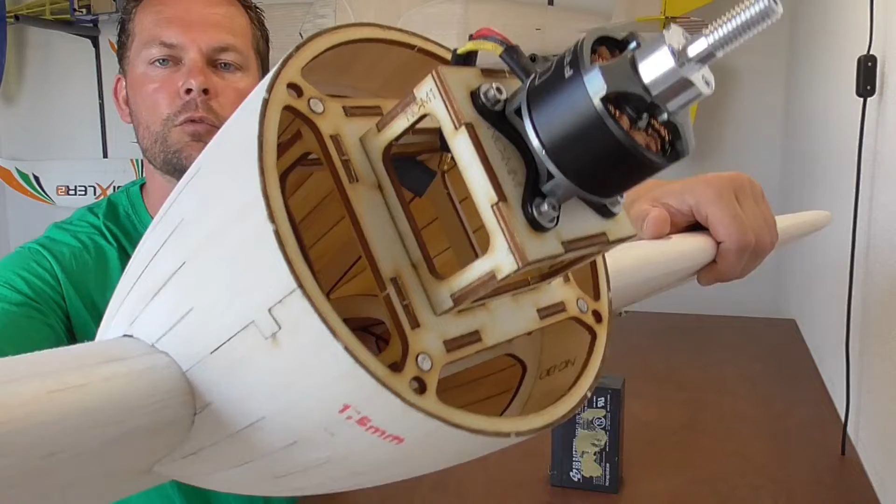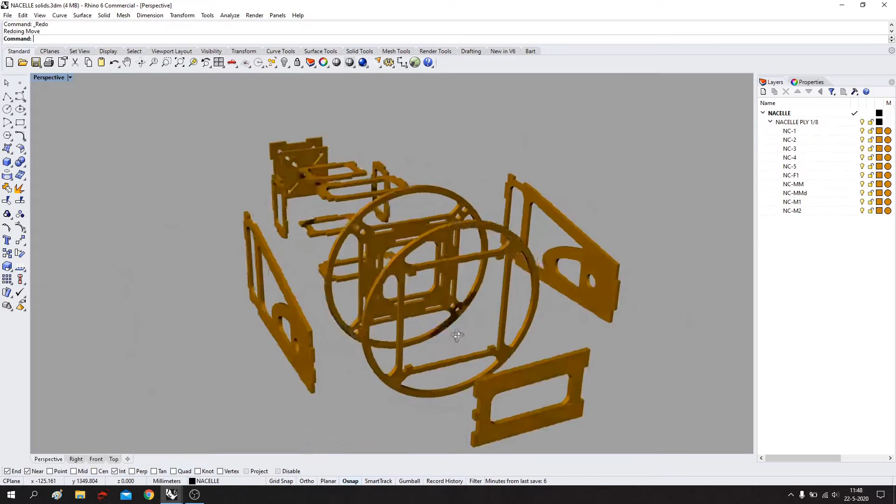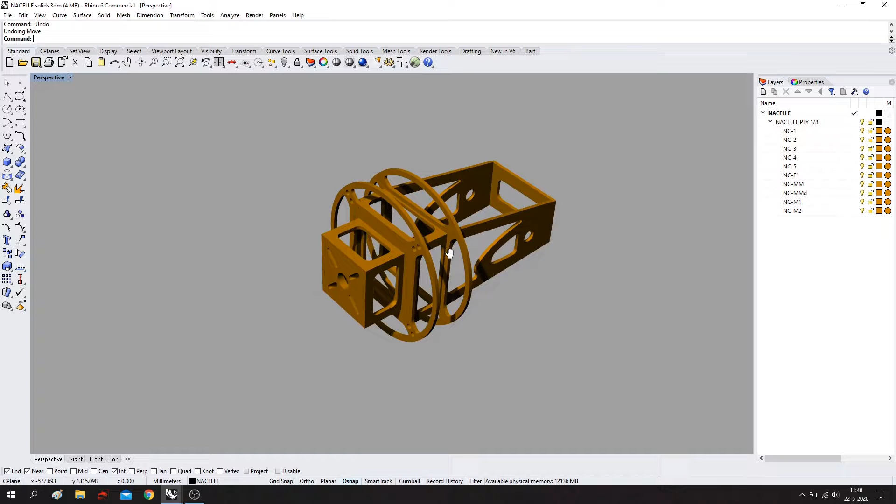These are the plywood laser cut parts for the nacelle. I exploded them here so you can see the parts as separate items. They're all interlocking using depth locks, so it should go together very easy. Let me just reassemble it. So this is the nacelle framework. You build it as a sub-assembly before installing it in the wing. Let's make it spin and look at it before moving to how the nacelle was inserted in the wing.

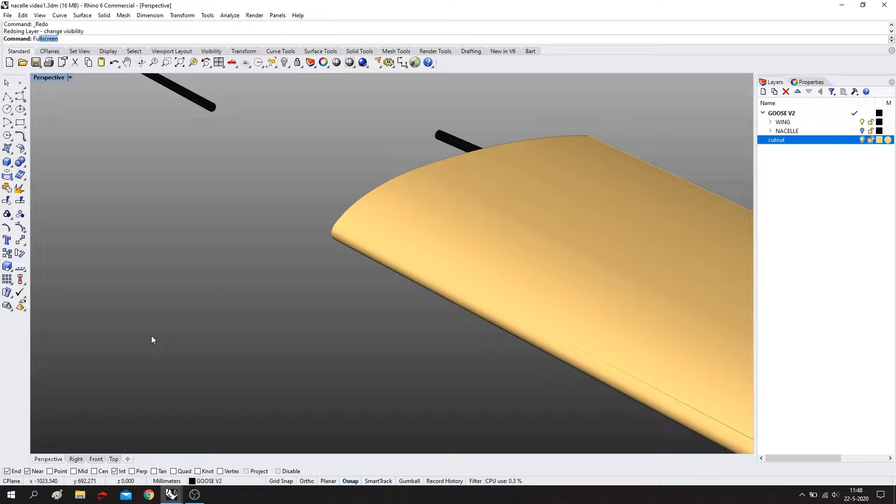So this is the wing, and we need to make a cutout in the wing. Then insert the nacelle frame with glue obviously, and it's then locked into place with one of the wing tubes.

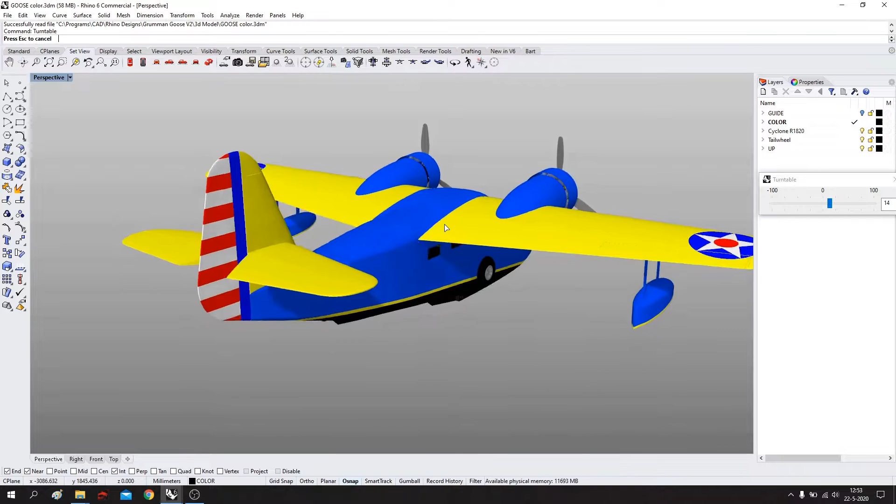So then the pre-cut nacelle planks. Many of you have been asking how I made the pre-cut nacelle planks for the Goose. So I want to show you some CAD work I did. You see here is the basic 3D model for the GooseV2. This is the model I used to make all the laser cut parts. And for now let's zoom in on the engine nacelle.

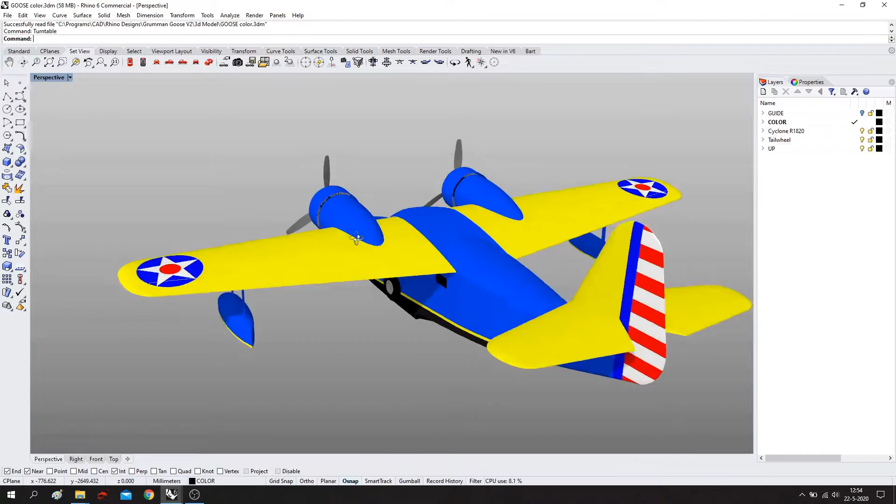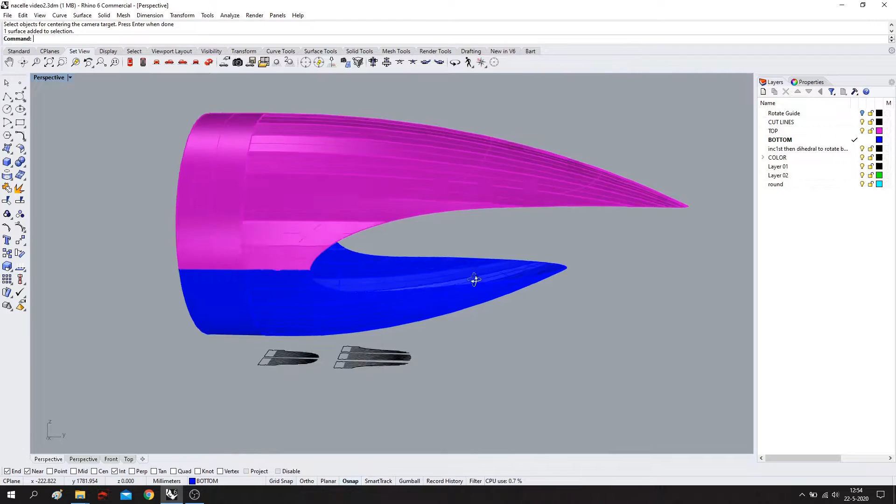If I select it, it's clearly visible that this is a complex shape with compound curves, so it's impossible to make accurate flat surfaces out of it. To be able to do that, the nacelle surface has to be modified into something looking like this. This is a simplified shape of an engine nacelle, and it's also divided into the top and bottom, which makes it easier eventually to glue the sheets in place.

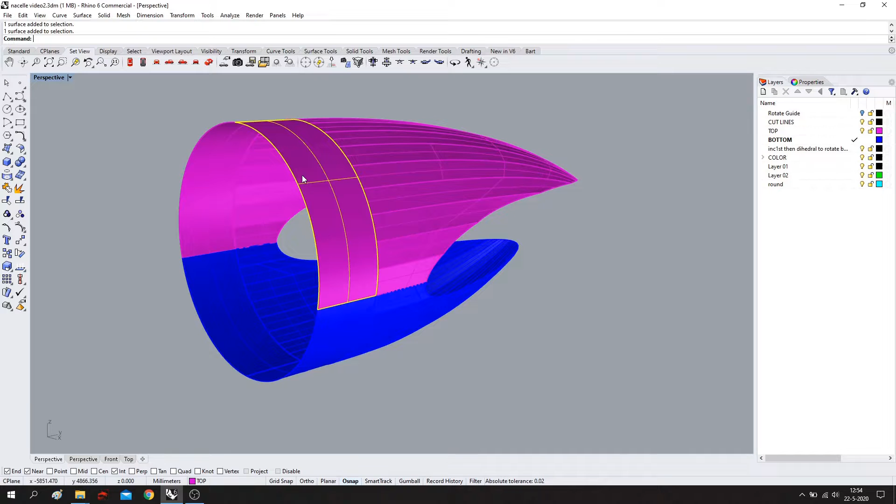The forward part of the nacelle is a cylinder shape. This is a single curve shape which can be unrolled. For the area behind that, the original 3D model, it's a compound curve shape, so you cannot unroll it. But I simplified it into single curve planks which can be unrolled. These planks were made using these rails and cross sections I made.

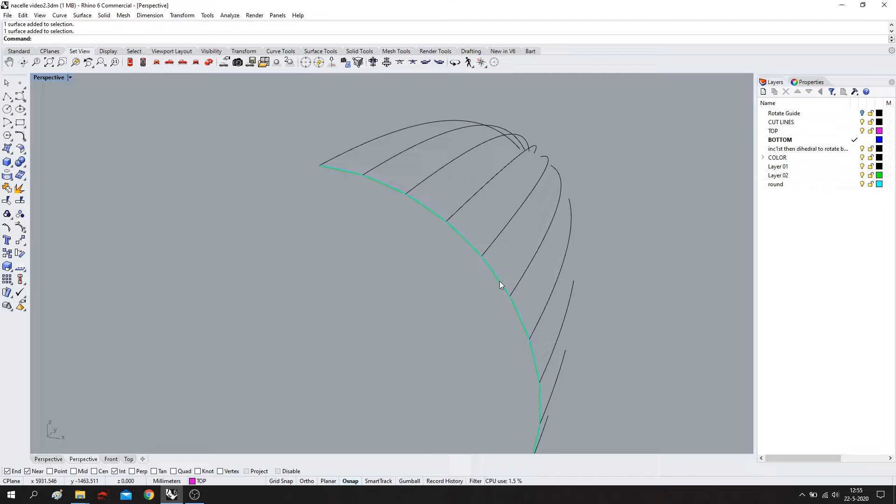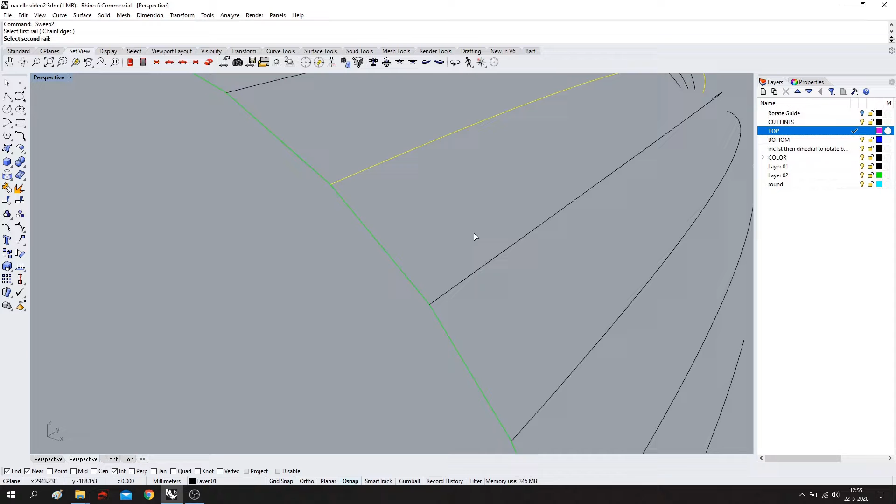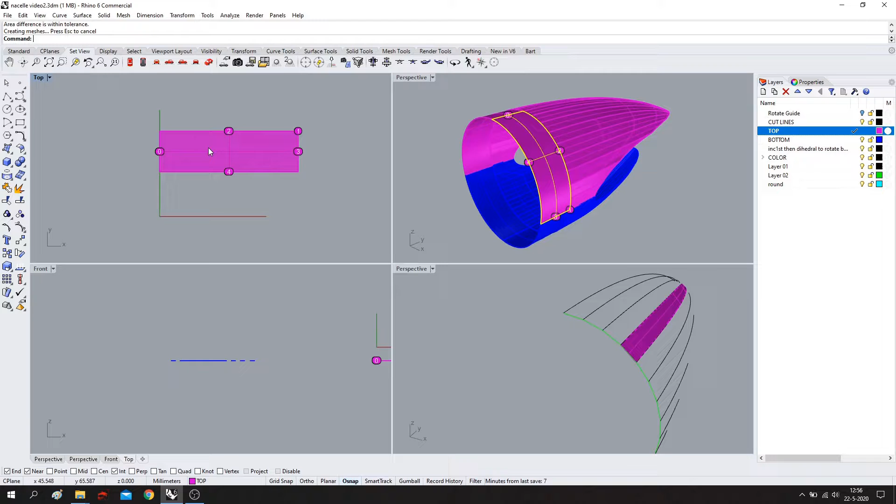So how does this unrolling go? You select the surface you want to unroll, use the command unroll surfaces. We do not want to explode it, and yes, I want labels, and you press enter, and there it is, the unrolled cylinder part of the nacelle. These are the same two parts. We can do this also with the strip planks.

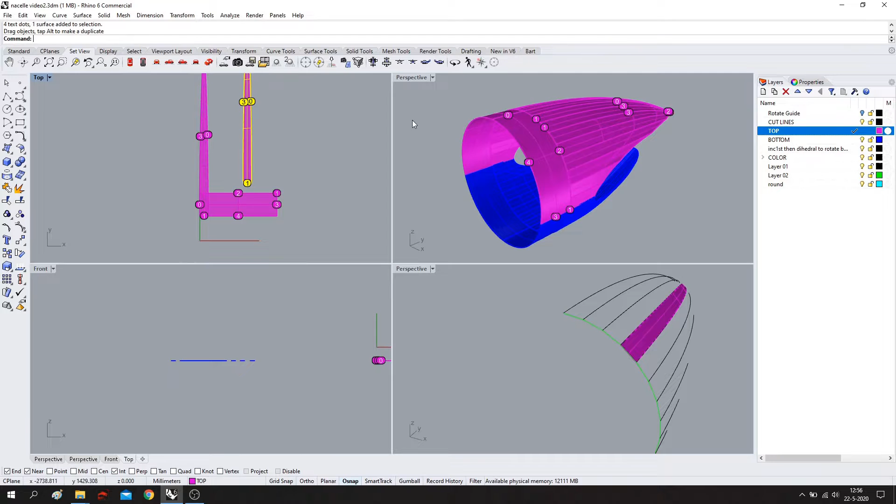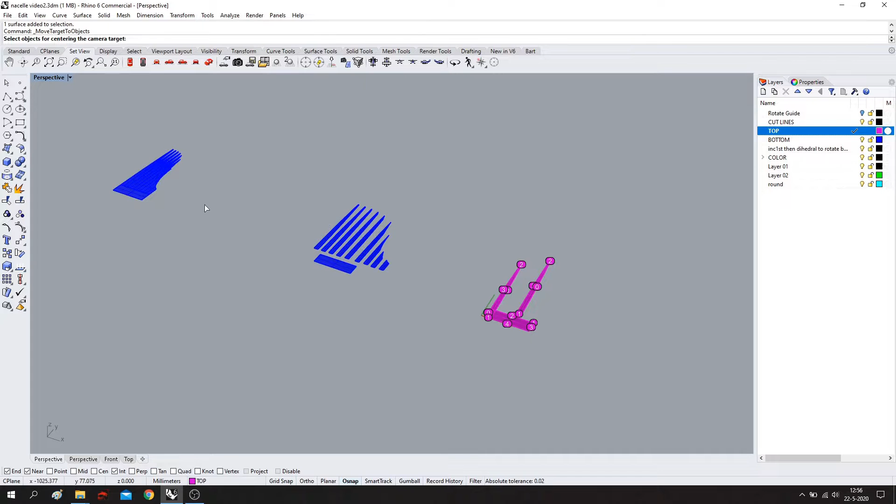And they're all laying on the construction plane, the unrolled surfaces with labels, so you can orient them in the correct way. So after a few minutes you will have all the individual parts, which can then be put back together as you like.

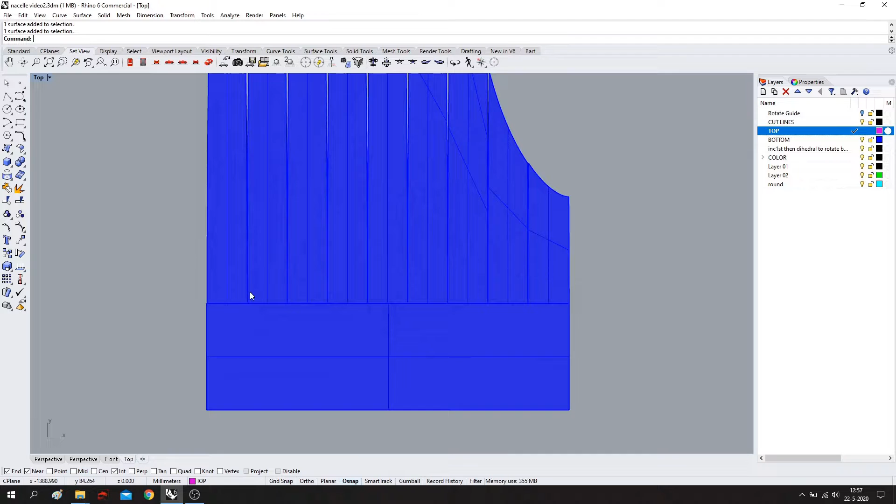And then one thing that you will notice is that the dimensions of the unrolled cylinder part do not match the planks, because obviously I simplified the shape. You see here that there's a little difference. This is easy to solve using the command transform, scale in a single dimension.

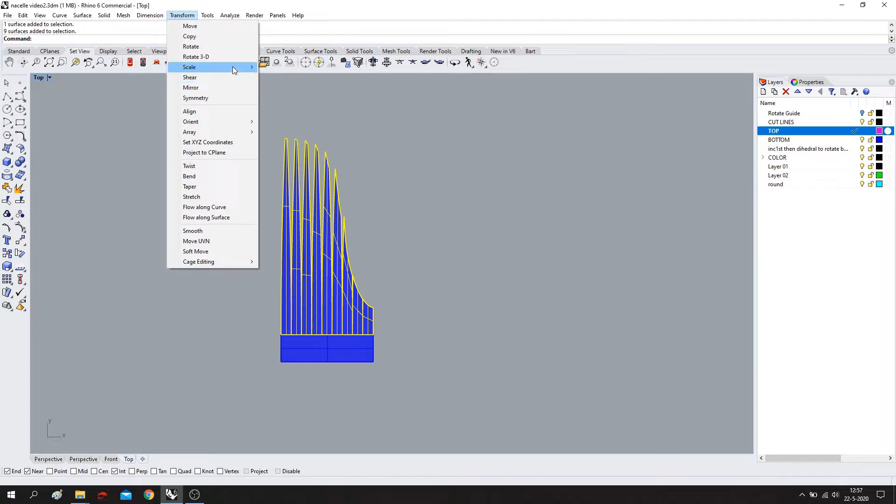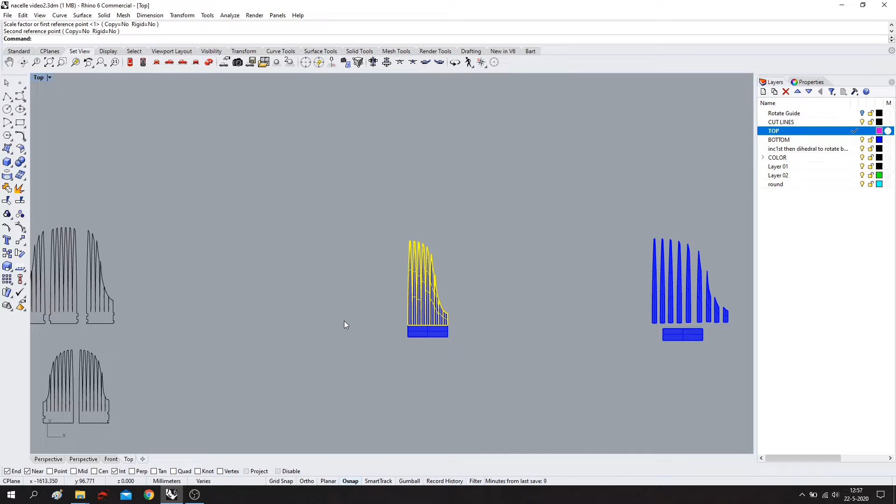You choose the base point here, and then the first reference point by the start of the nacelle plank, and then you just scale it to the end of the cylinder part. So this is an unrolled plank surface, and I did make these single parts of it, so they fit on the laser cut parts.

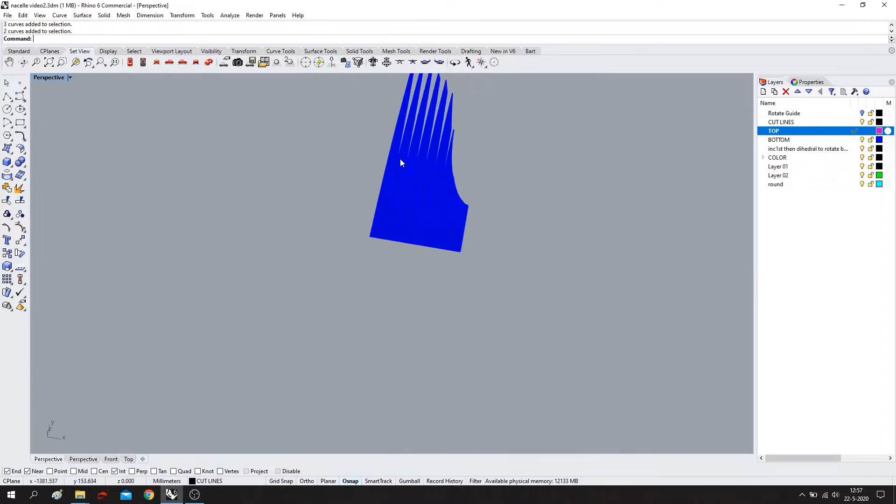So I hope this makes it a bit more clear on how I made the pre-cut planks, and it will give you some insight.